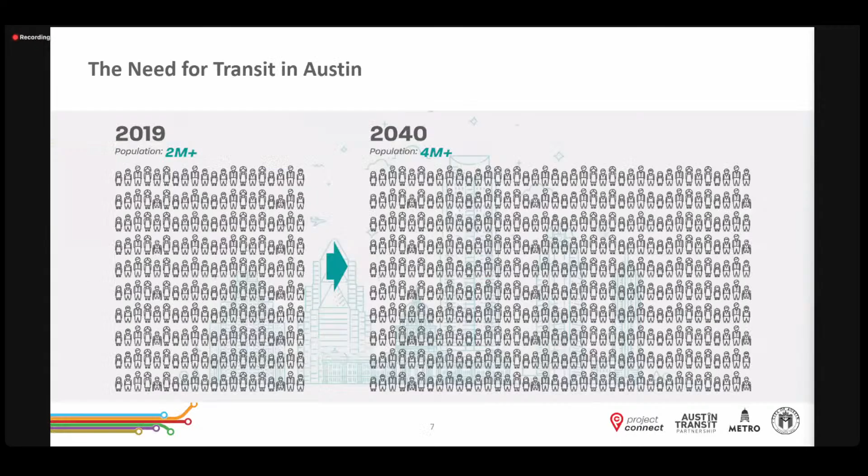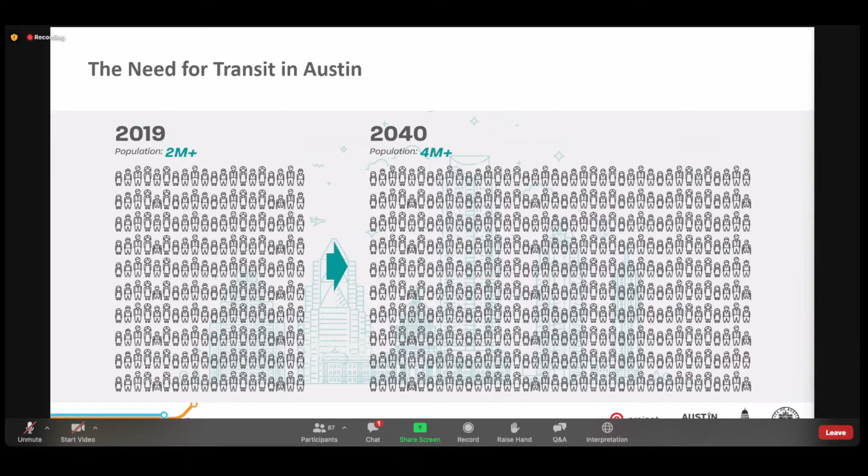Just wanted to introduce you to Project Connect and what we're looking to solve here. This slide explains the need for transit in Austin. Over the next 20 years, we're going to see a doubling of the population in Austin. Very popular city, a lot of people hearing about it, a lot of people moving in. What does that mean for us today? Well, all these folks cannot get into a car, so we're looking to address some of that growth by having people make smarter choices. If we can get them into light rail or a different mode, that's what we're hoping to accomplish. Will everybody get out of their car? No, but we're hoping to get a good number of folks to make smarter choices that are friendlier to the environment.

So, the Austin Strategic Mobility Plan. What this shows is the goal to keep the number of cars constant while growing our population by an additional 2 million people. You'll see as we go through these design drawings, this is where the policy rubber really meets the road, and why we are designing to a variety of modes to address that growth, while making sure all modes are respected and we're getting a good balance going.

So, Project Connect program components - some of the big things we've got here. By no means is it everything, but: a new light rail system, the blue line and orange line, a transit tunnel under downtown that will make everyone's trip faster, an expanded bus system like the 801 and 803 that currently exists, 4 new Metro Rapid routes, 9 new park and rides, and 11 new pickup zones. We are also transitioning to a zero emissions fleet, which, as someone mentioned this morning when we were on site, could also mean a quieter cityscape. You don't have a loud diesel engine, you have a quieter electric vehicle. So we're really looking to benefit the community on multiple levels, not just in having cleaner air, but also a quieter city.

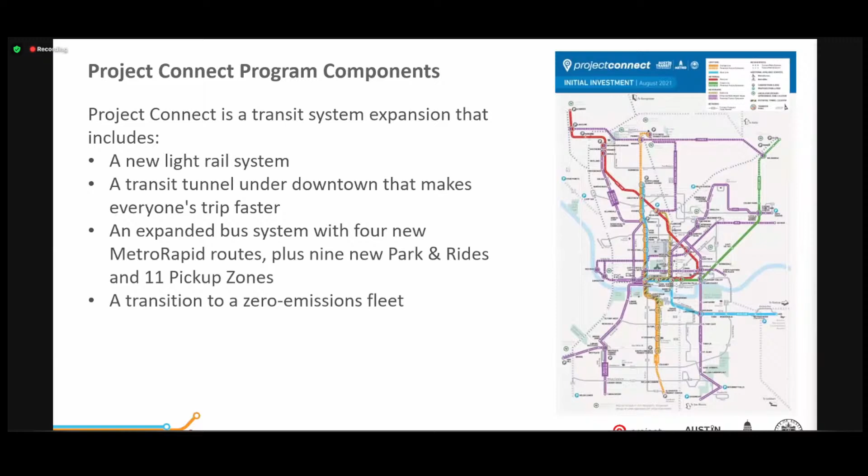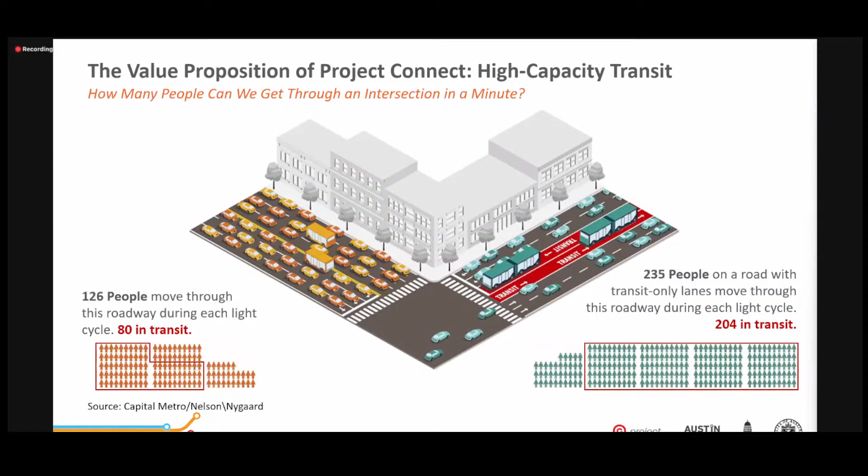So the value proposition of Project Connect - the question really is, how many people can we get through an intersection in a minute? As you can see with this animation, with the light rail transit line, we can get more folks through a light cycle than they would have been able to in a vehicle. On the left, you can see 126 people move through, 80 in transit, but with a dedicated right-of-way, 235 people on a road can come through, and 204 of those people are in transit.

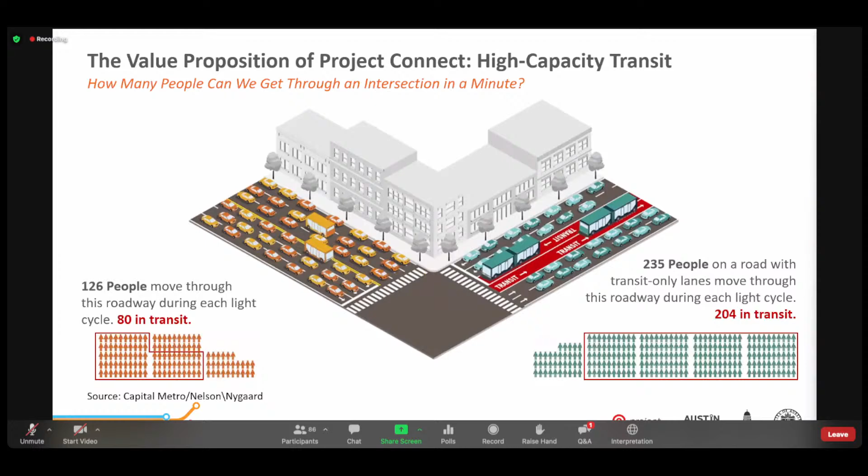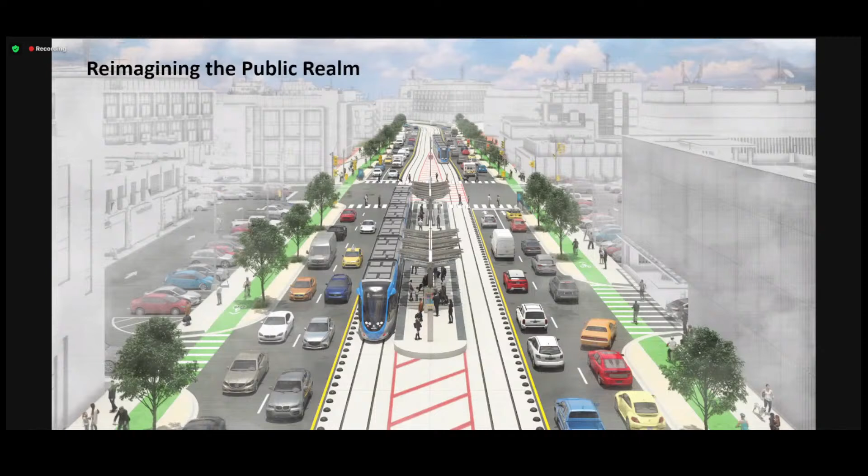Here we see a conceptual view of what Project Connect will look like. This isn't necessarily one particular location, but is representative of our aspirations. Moving the picture left to right, you can see a dedicated bike lane, new sidewalks, new trees, cars sharing the space, high-vis crosswalks, light rail in the center median, station platforms with shade, and again the same treatment on the other side - dedicated space for trees, bicyclists, and pedestrians.

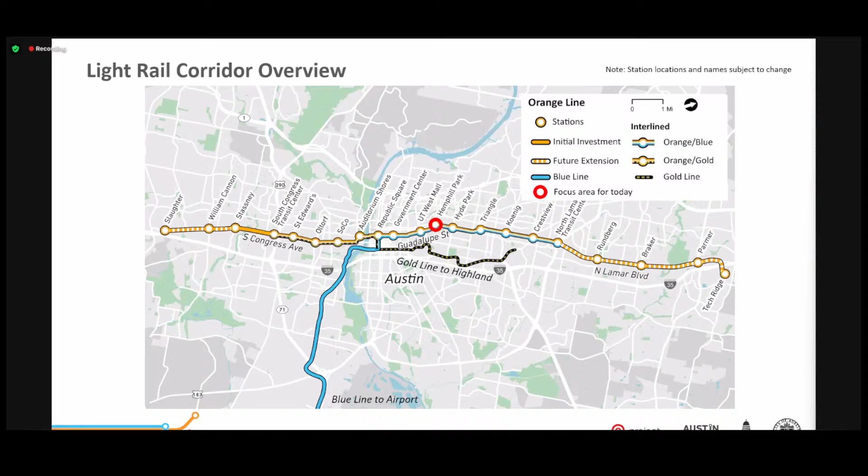We want to talk to the community about that, and then ending at the North Lamar Transit Center. The blue line shares that route south from North Lamar Transit Center, also serving UT and the drag, but as it goes underground it will serve downtown and then branch off to serve the airport and Riverside Drive. Next slide, please.

So hot topics, what we've heard, themes of interest, and we're going to hit on these throughout the night: public safety inclusion, housing diversity and community integrity, ecological resilience, health and well-being, efficient traffic planning, urban design excellence, consideration of the tunnel versus street level for Guadalupe from 21st to at least 38th Street, maintaining housing diversity and community integrity, and the greening of the route.

We've been hearing a lot from the community on these topics, and we wanted to spend some time tonight addressing some concerns and providing clarification. So stay tuned for the rest of the night, you'll be seeing us touching on these topics. Next slide, please.

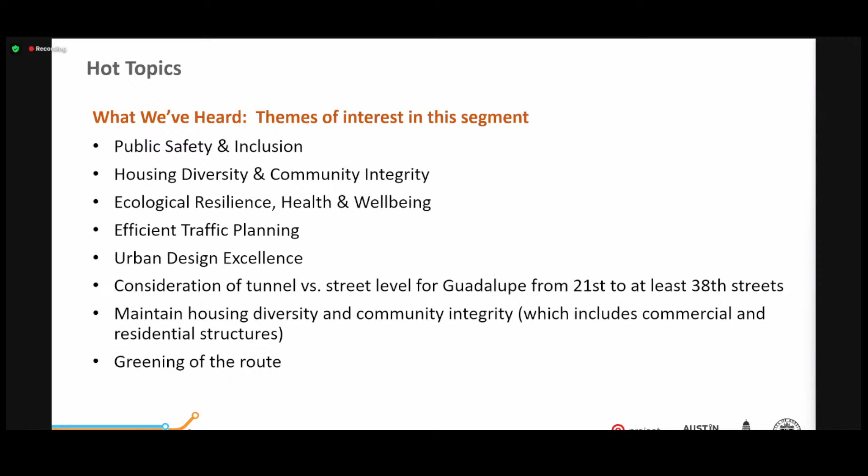So today's discussion areas, as Lonnie mentioned earlier, we're going to do it in two parts. I'm going to hand it off to Peter Mullan for part one. Peter?

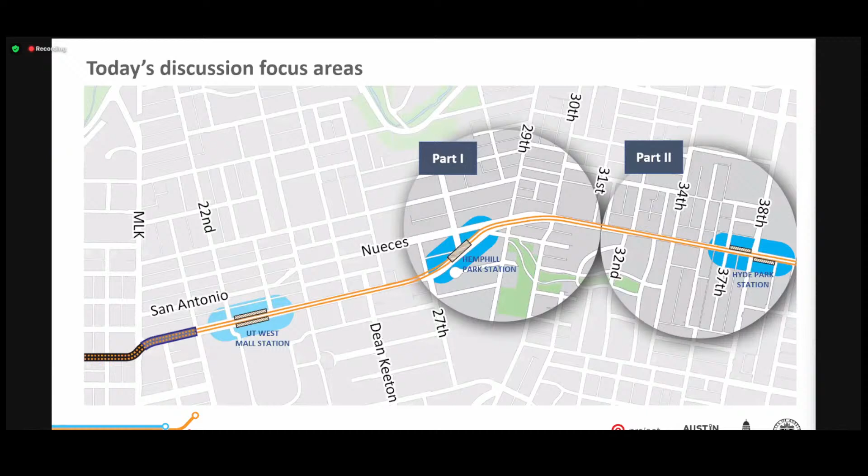Got to unmute. Still make mistakes on Zoom after all this time. Nice to see everybody, thanks for taking your time out of your evening to join us. Really appreciate it always, and as Lonnie said, if this is your first time, even better.

Yeah, we want to talk a little bit about 29th Street in particular and what's going on there. Some pretty interesting opportunities and some changes to the configuration of that intersection. Go to the next slide.

Just as a reminder, many of you may have participated in the community design workshop about the drag that we held in the fall. We are currently carrying two options for the drag, and those two options get carried forward all the way up to 29th Street. We'll talk about those two options when they get to the Hemphill Park station and 29th Street. Go back one, sorry.

Option A is an option where you've got the guideway with the light rail in the middle of the street, and then one lane on either side, which could be used for buses or buses and general purpose traffic, and then a shared use path on either side of that. Then go to the next.

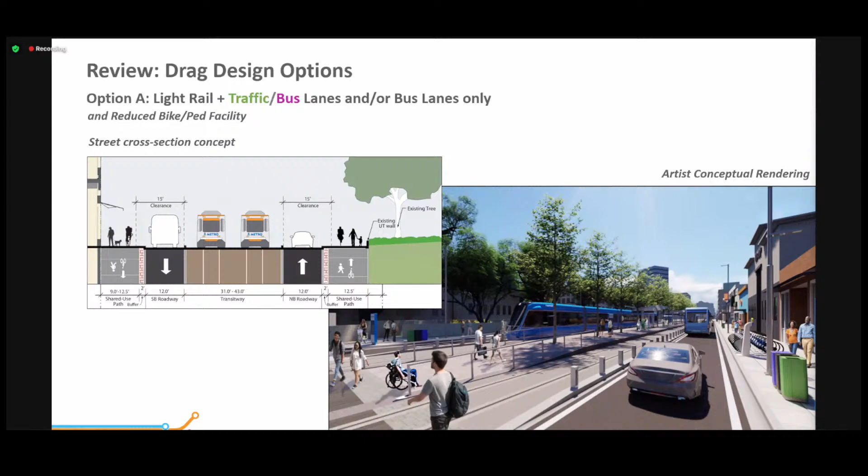Option B is the transit mall concept, where all general purpose vehicles would be relocated to other routes around the drag, and then the guideway would be used for light rail and potentially buses as well. Then you have separated facilities for bikes and pedestrians on either side, as well as trees, etc. So those are the two options, and they do move forward to 29th Street.

I do want to make a plug for another workshop we're holding on the drag on Thursday, February 24th, that's in two weeks. Hope that you will all be able to join us for that. Okay, next.

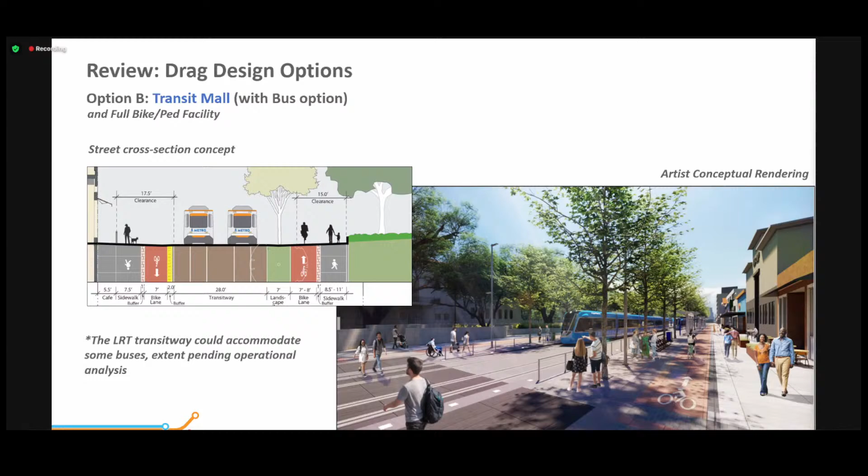Moving north from the drag, we get to the Hemphill Park station, between 27th and 29th, and then the intersection with 29th itself. As we go through this, you'll see there are a number of properties and blocks impacted by the alignment of the light rail and the reconfiguration of the intersection at 29th Street and Guadalupe. We've notified all property owners, but if we haven't connected with you and you're a property owner or operate a business in this area, we want to connect with you. Part of the purpose of tonight is making sure we're reaching all local stakeholders. So let's dive into this intersection.

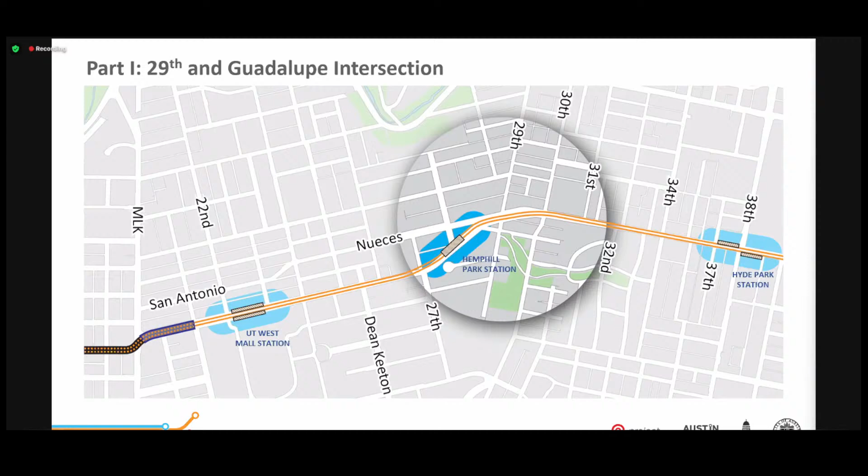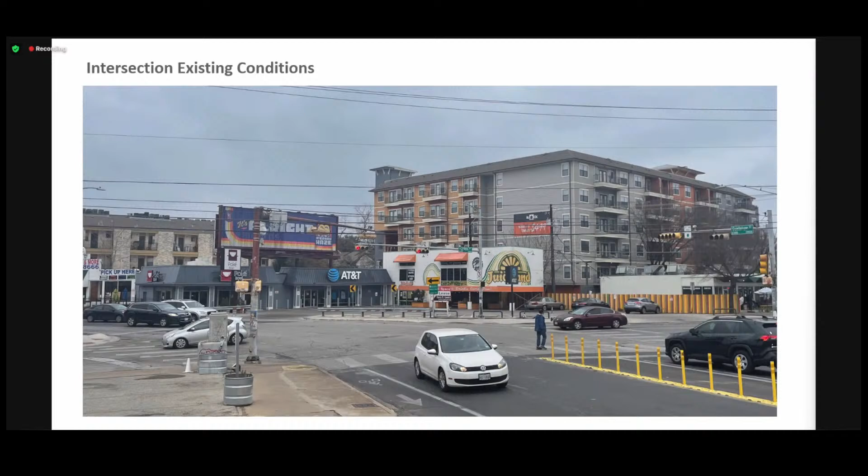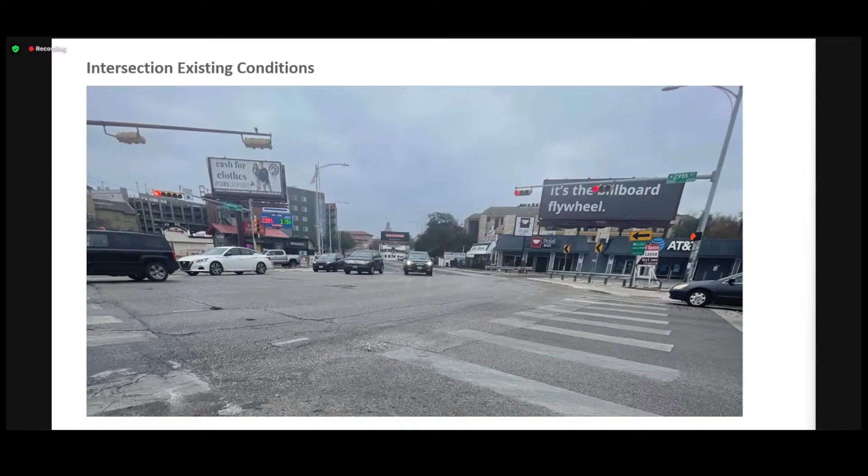This is a picture of what the intersection looks like today. If you've been here, you know just how difficult this intersection is for all modes, whether you're driving, on a bicycle, or a pedestrian. It's a pretty daunting place. You can see there's a huge amount of asphalt and very awkward geometry. If you're at Juiceland and want to get to Taco Shack, you have to walk across three different crosswalks and light signals to make that maneuver. It's very awkward, and also very unattractive.

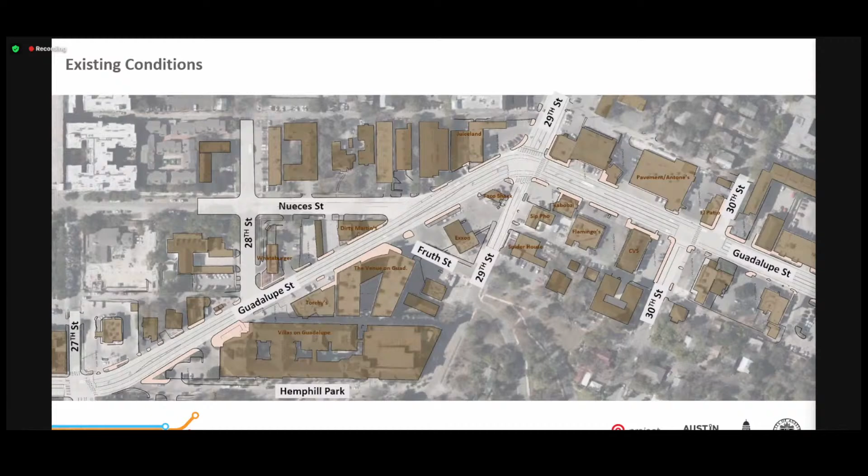If you look at the next slide, which shows option A, as Peter just mentioned, this is the one where we have general purpose lanes on either side of the trackway. You'll see we've had to create a geometry with much smoother and bigger radiuses to make all of this work. But it's not just about bringing the rail through this area—it's about creating a safer environment for all modes. Whether you're a cyclist, a pedestrian, or riding in a car, the idea is to make this a safer, more attractive, and more efficient intersection.

So option A again is the one with general purpose traffic lanes on either side of the trackway. If you're heading north on Guadalupe, you'd be on the east side of the guideway and join Guadalupe at the 30th Street intersection. You'd have a full movement intersection at 30th Street, also at 29th Street, where there would be a signal. If proceeding south on Guadalupe, you'd continue south along the trackway past 29th Street, or directly onto Fruth Street, which would be connected to that intersection.

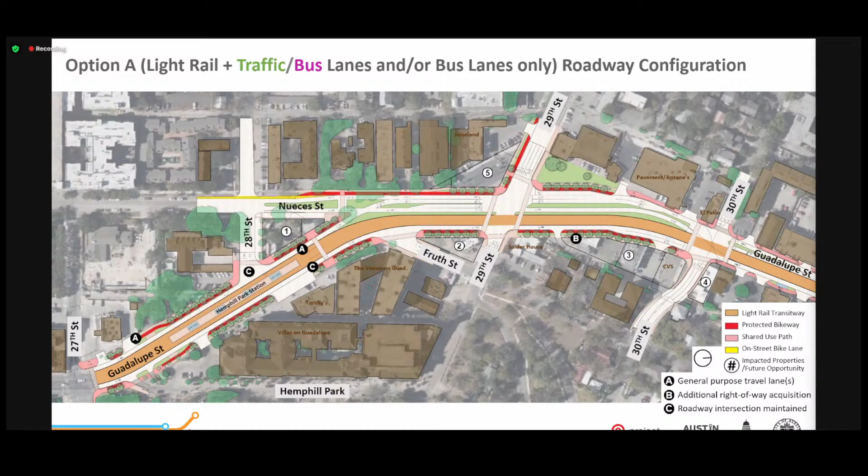Option B is very similar, but with the transit mall, all north and south traffic south of 29th Street would be directed onto Fruth Street, which would operate as two-way south of 29th Street—an improvement the city's corridor project office is planning to implement over the next year.

If you're a cyclist on either of these alternatives, the dark red on this diagram shows a protected bikeway, so a cyclist coming through here would be completely separated from the rail and vehicles, making it much safer. You also see a lot of trees on this diagram—we have the opportunity to create a much greener and shadier environment.

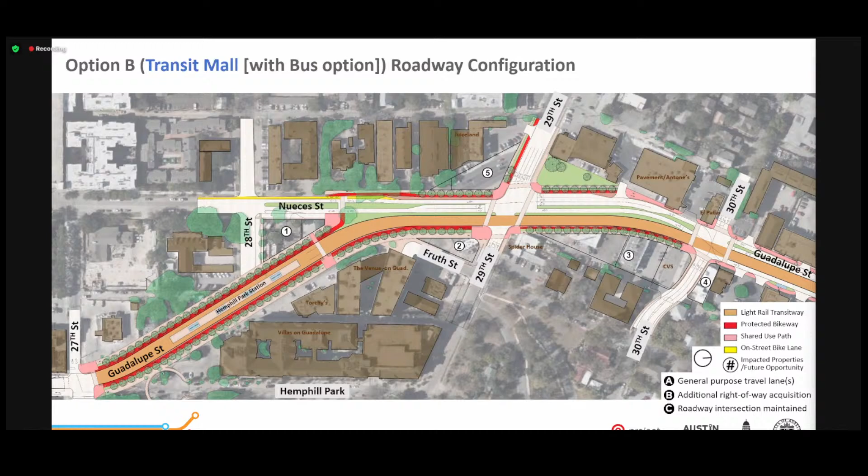The way transit works through here, we end up with remnants of right-of-way that are no longer needed, and remnants of properties needed to make this alignment work. So there's a question of how those properties might transition in the future and contribute to the public realm. We've identified one area in particular that we think would be ideal for public open space, at the northwest corner of 29th and Guadalupe—you can see here it could be a small park. But the overall goal is to make sure the rail works efficiently while creating a much safer and more attractive environment at the center of this part of town.

This is showing the existing condition on top and what it will look like in the future, resolving some of the awkward and unsafe aspects of this intersection.

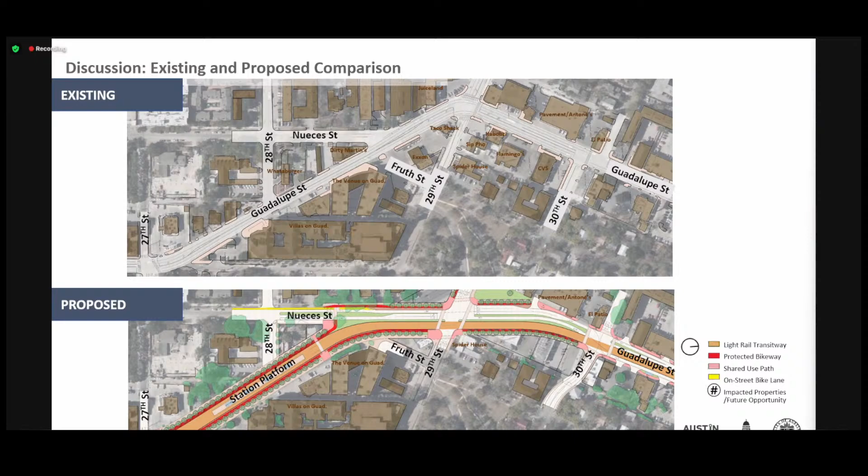Before we get into the tunnel discussion, one thing I want everyone to be aware of is that when designing a system like this, we only implement tunnels where absolutely necessary, and when it's the only technical option. For example, the downtown tunnel exists because we have limited block lengths and the stations are longer than the block lengths, so we don't want to block cross streets. We're also crossing under the river because there's no opportunity to come up sooner than we'd like. So those are the technical issues, just as an example.

Anytime there is a tunnel, one objective is to come back to the surface as quickly as possible, because it's more cost effective to operate that way. So the question is, does extending a tunnel, and the perceived benefits of that, justify the additional cost?

Let's play the what-if game. Say we wanted to extend the tunnel here in scenario one. On the bottom left-hand side, you see the tunnel portal outlined with blue dashed lines. That's where we're proposing the existing tunnel portal, and it would rise up out of the ground and be at grade throughout the West Transit Mall.

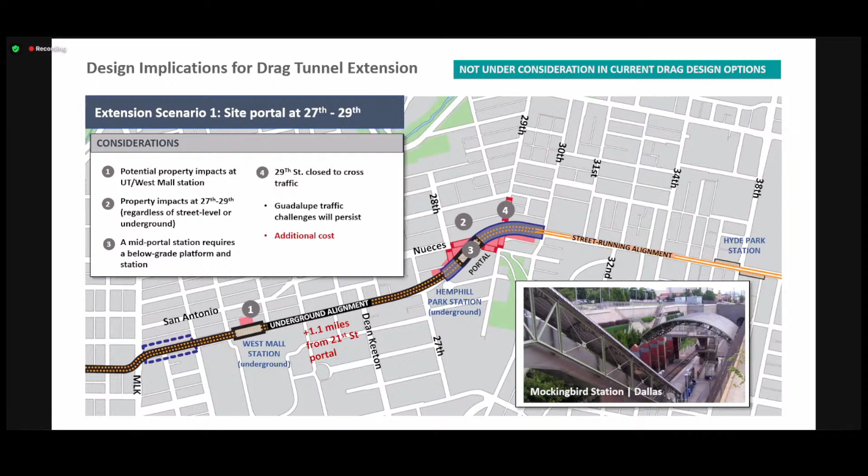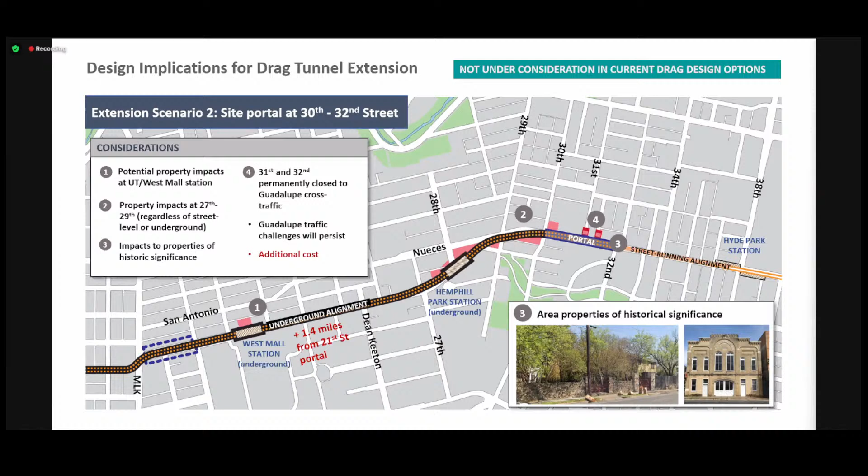In scenario two, the next logical portal location would be somewhere between 30th and 32nd Street. Now we have the cost of two underground stations — one at West Mall and one at Hemphill Park — so that's additional cost. The portal itself is also an issue because on either side of the right-of-way where the portal would be are two properties of historical significance that would likely be impacted due to the wider right-of-way needed in those areas.

The last scenario would extend the tunnel all the way out to 34th Street, or just south of 38th, between 34th and 37th. This scenario has a couple of issues as well, since it would require closure of east-west traffic on 35th Street, plus additional property impacts, and impacts to some pretty significant storm sewer lines in that area, about 108 inches in diameter.

So it's pretty significant, and you see that extending that tunnel just adds a lot of additional costs without a lot of benefit in this particular area. Bottom line, when other options are available, you take those other options. You don't build tunnel, you only build tunnel when you just don't have a choice. An additional 1.7 miles of tunnel would be quite extensive and really not generate the benefits we'd like to see.

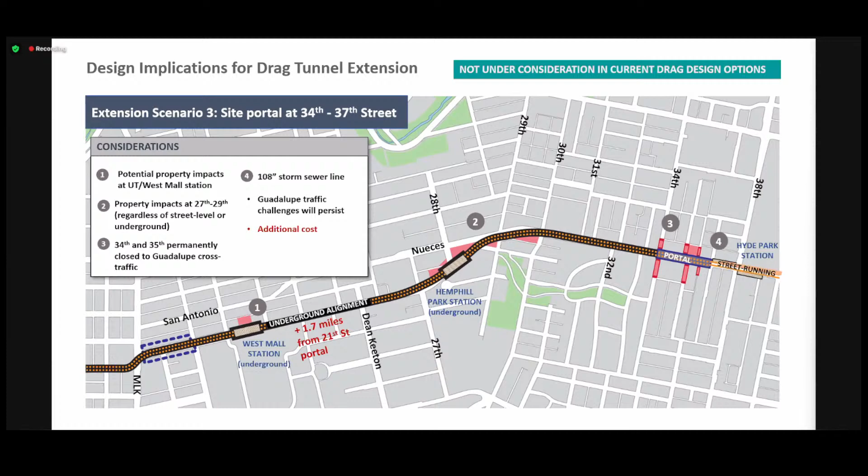Well, thanks, Jerry. I appreciate your help here with this section. I know that several people have already been asking some questions in the Q&A and in the chat.

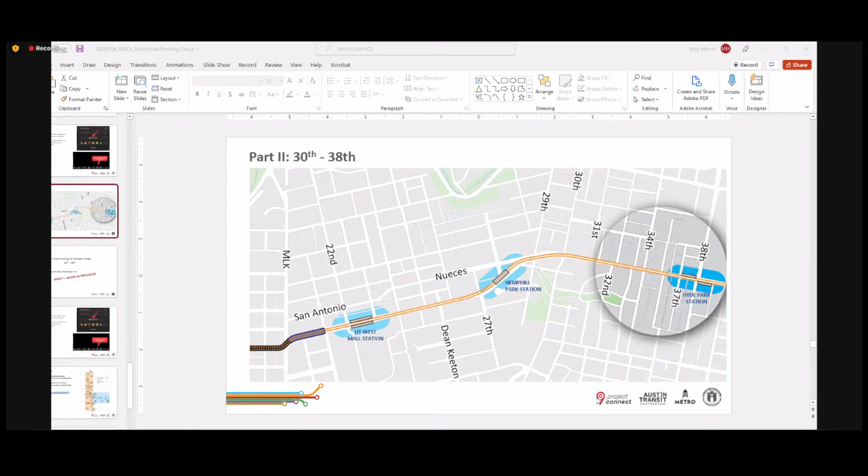In progress, live updated, yes, in progress. So we're going to transition a little further up the corridor. I just want to ask for the technical folks on this meeting - there's still a lot in the Q&A, so if you could take some time to put some answers in there, that would help. We will try to circle back as well, but we're going to move up the corridor to 31st Street and above, and we're actually going to walk through and look at some of the schematics themselves. This is an exciting first peek because we're kind of in between the 15% and 30% design, so you'll see where we are at the moment - it may change a little, but this is where our thinking is.

So EC, I think this is your part of the show, right? I think so. All right, good. Okay, so if you can hear me and if you can share my screen, I think you do. Okay, perfect. So what you're seeing right now on the screen is the latest design that we have. It's in a weird program, so that's why it looks weird. I want to explain here first what you can see so you orient yourself and know what each color represents.

To the right of your screen, that's north. And we are seeing here 30th Street, which we already talked about. In the middle of the road, you're seeing this green shading, representing the area where the orange line is going to be. The red line is the northbound train traveling north, and blue is a train traveling south.

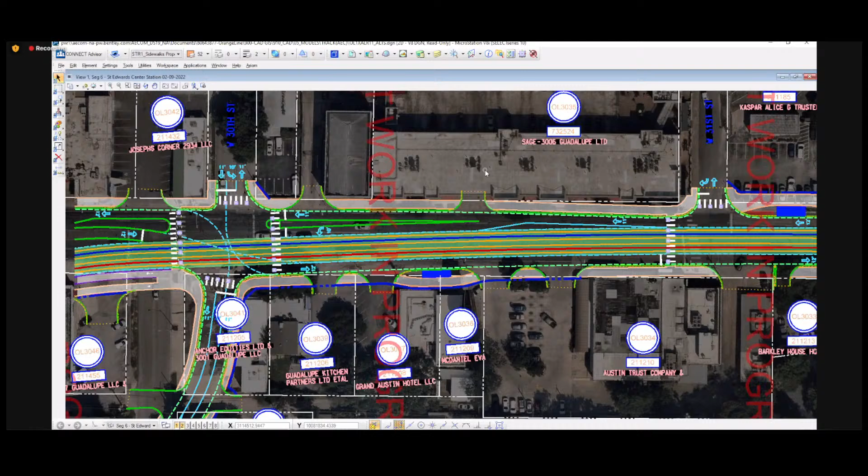Okay, so this is not the names of the businesses. This is the name of the owners. That's what we have right now. That's what you're saying, so if it's not helpful, I'll turn it off. It might be blocking more than helping. Yeah, I think it's more, I don't know if other people think it's a lot. Yeah, I feel the same way.

We'll just make sure to point out businesses as we're moving, but it looks like El Patio and Wheatsville is there, and that line's getting real close to Wheatsville.

Yes. So let me go into a little bit more detail on what you're saying so that we can talk about certain impacts that we're seeing. The gray shading is representing, in other areas, sidewalk and/or bicycle facilities. At this location, we are showing a shared use path. I saw that comment in some of the questions. We're showing a shared use path because, as you all know, it is very constrained around here. So when possible, we are reducing the sidewalk and bicycle facility, like a bicycle lane, to a shared use path in order to reduce the building impacts.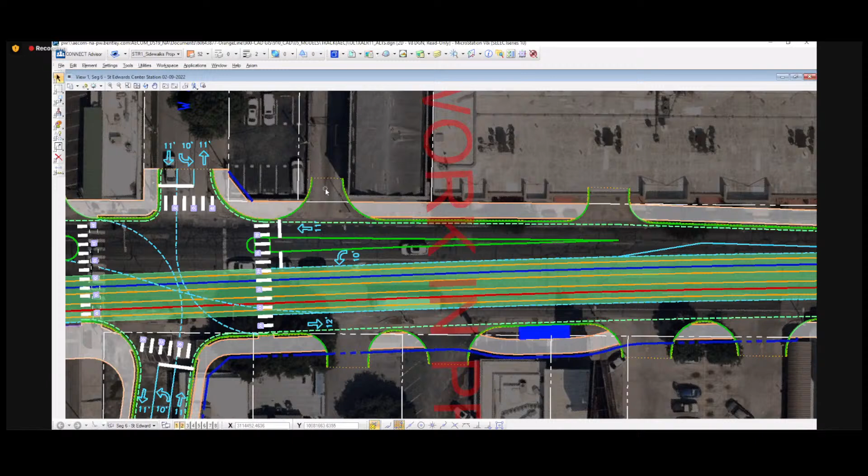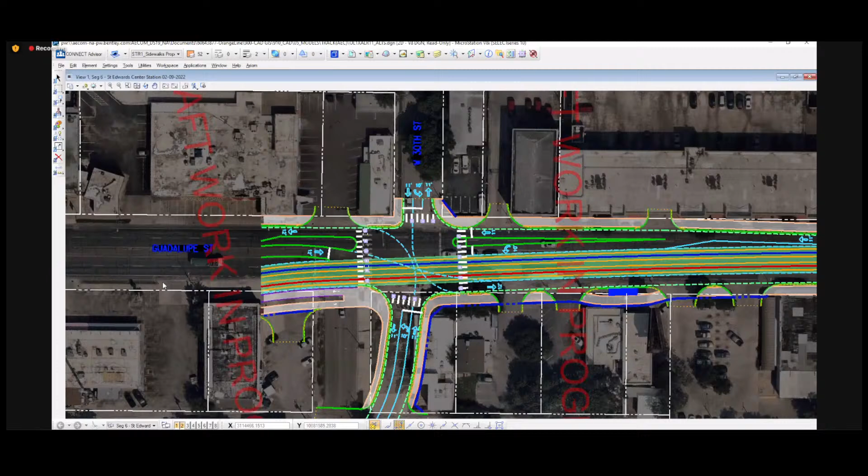Whenever we reduce that and see that it means we're no longer impacting a building, we go ahead and do it. If it doesn't really result in a reduction of building impact, then we go ahead and show the ideal cross-section where we have a separate bicycle and separate pedestrian facility. So that's why you're seeing the shared use path, because to the south you see the separated path. That's perfect, I think that's good. So right here you can see it separated, and then just north of 30th, we're reducing it to minimize property impacts.

And then the blue line is a proposed right-of-way, and the white line is representing the existing right-of-way. So that's going to give you an idea of where we are showing impacts and where we're not. And then just throughout, you're going to see blue boxes, and that's representing a bus stop. I do want to clarify, this design is in the works, so things are changing. So just keep that in mind.

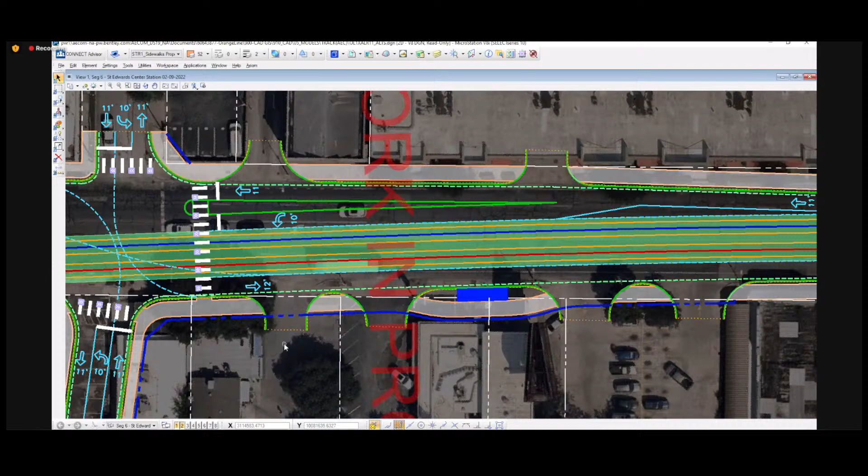As for the shared use paths, I know it's really constrained, so we're trying to reduce impact. The minimum width is going to be 9 feet, though it varies.

So let's talk about this location, for example. Here we have residences on the left side, and that's why we're trying to reduce impact as much as possible. We have Wheatsville right here, and at this location you're seeing a pedestrian crossing. This is a signalized pedestrian crossing, but we're only showing it as a proposed crossing, not for vehicles to turn here.

There's already an existing flashing beacon, so we are maintaining that. If you're a car trying to access Wheatsville coming from the north, you'll have to go to 30th Street, do a U-turn, and that's how you'll access their parking. If you're coming out and want to go south, you'll take a right and go to the next signalized intersection at 34th Street, do a U-turn, and go back south. As far as access from delivery trucks to Wheatsville, that's still in the process of being figured out. We are coordinating with Wheatsville to try to figure out how to best accommodate that.

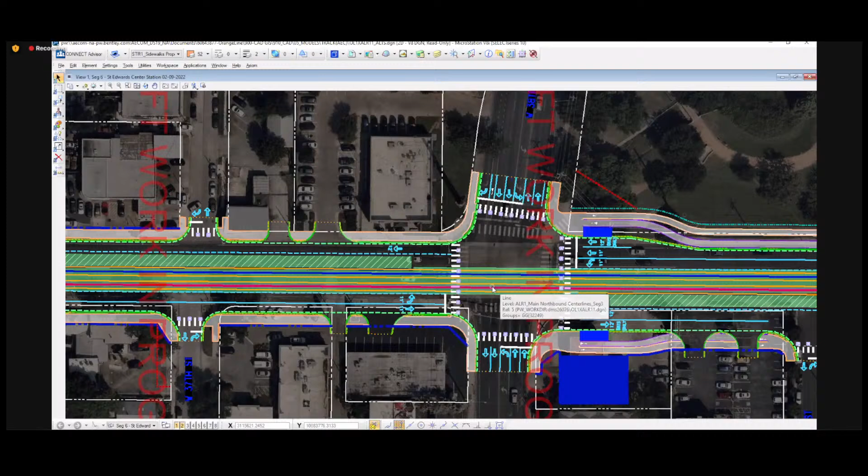And why do you go split versus a center platform in this location? So when we have an intersection like this, we go split because you have the train in the middle. In a normal intersection, when you don't have a train, you normally align the left turns and they disappear. When you have the train, you can't align the left turns, so you're already going to have this space here that nobody can use for some distance, and then we transition back to the middle. Since you already have that space, might as well use it and have the station there so that we minimize right-of-way impacts. If we were to have a center platform, then wherever we have that platform is just going to be wider - much wider impact. Thanks for that.

And then there were some questions about U-turns being realistic. Are these U-turns just 'make a U-turn,' or how are we making sure that people can actually make a U-turn? This is all in the process of being evaluated, adjusting the design to see if we need to make any adjustments. And also I'm assuming there'll be lights involved, right? Signalized is what he's going for. So the U-turns would be signalized. They'd be protected.

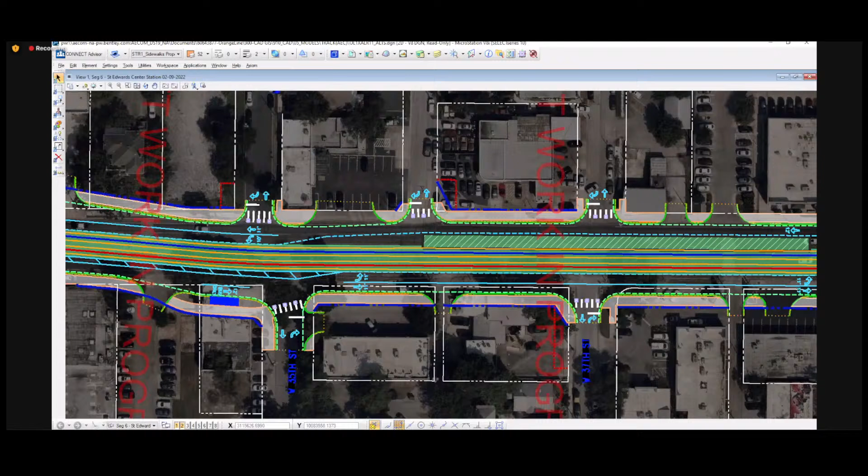Betsy, did you want to unmute? I didn't have a question. Ah, well, your hand was up, so I called on you. But hi, thanks for being here tonight.

How about Ava McDaniel? I see your hand is up. Would you like to speak? Well, I see you're unmuted, but we can't hear you. If that continues, you might want to send me a chat and I can read your question on the air if you like, so that we can answer that.

We do have a question, Lonnie and team, about - similar to how we covered the consideration of underground - do we consider elevated in this segment?

Ah, yeah, that's a really great idea. So I know a lot has been talked about tunneling - what about going up in the air? Isis, can you maybe zoom out a little bit so we can see the section as a whole, maybe from 38th down to 31st? I think just to give people context, that'd be great. Thanks.

So we did consider that early on as we were developing the locally preferred alternative, but that was dismissed very early because aerial tends to be a little bit more obtrusive from a visual perspective, and also due to the proximity of the neighborhood, particularly the Hyde Park neighborhood there, it would receive a significant amount more noise. So it's more of a noise issue than anything. Everybody seems to think that if it's aerial, you're avoiding all these various conflicts, but those bridge piers still have to go deep into the ground, and there are still utilities that have to be moved regardless. So the only thing you get to do is maybe save a little bit of your traffic lane widths and stuff like that. But we dismissed it.

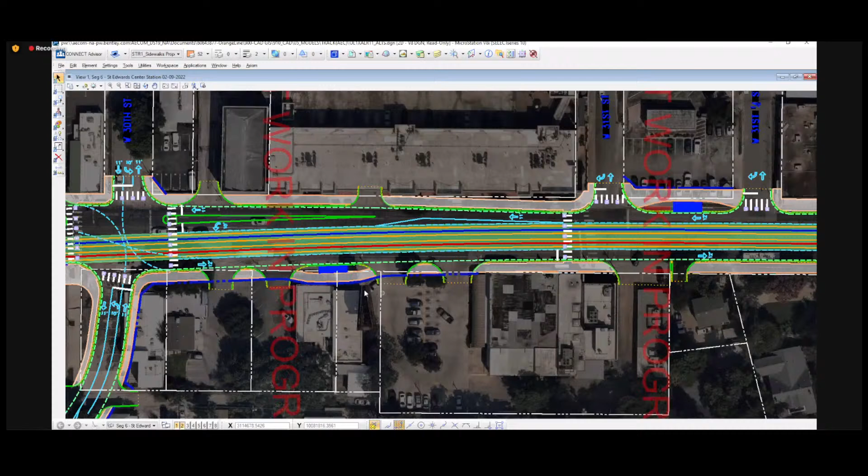There's a bus stop in front of my building at 30th and Guadalupe where Supercuts is located. The building south of me, which is Bickles, we have a shared party wall. So is that going to impact, are you going to have to tear my building down? That's all I want to know.

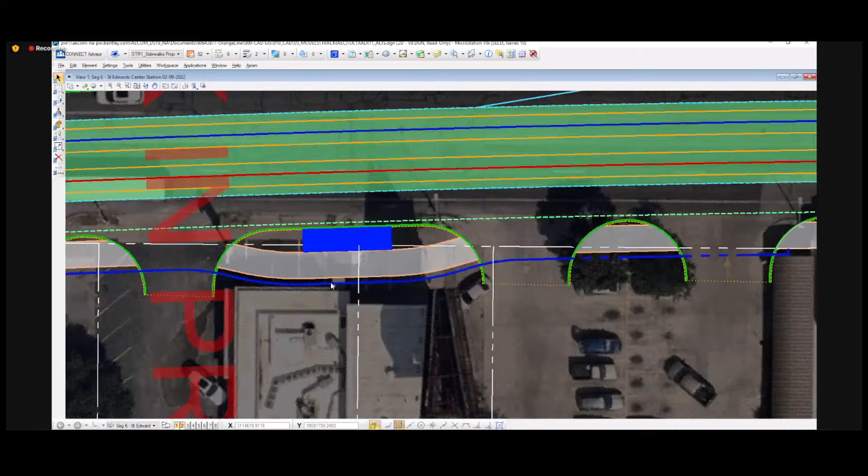No, as you can see, we are not touching the building. I can see how the blue line looks like it's very close to the building. We are verifying, and the reason I'm telling you yes or no is because I'm checking the topographic data that we have, and we are not touching the building. You also have to keep in mind that we are showing some setback between the edge of the sidewalk and the building, so there's more feet there than what it's easily seen. So, no. Okay good, I'll quit sweating bullets now. Thank you, I'm glad I could help.

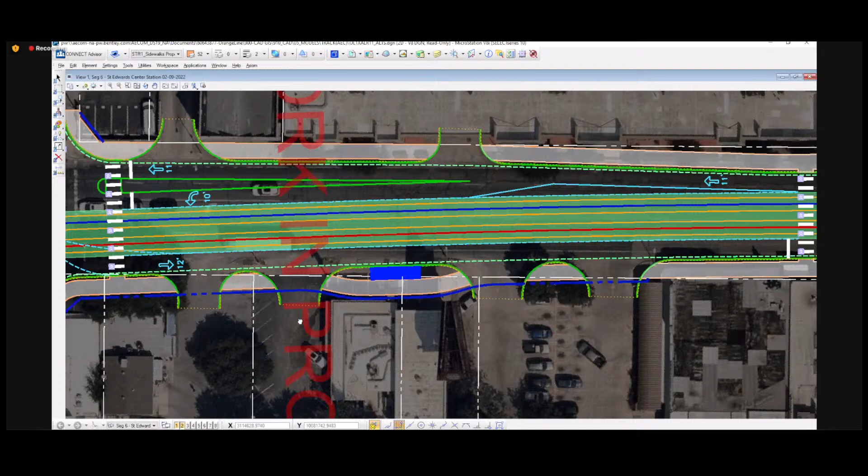Okay, Lonnie, I think Lonnie is muted, but I think there we go. Yeah, you're right, I muted. There was a question. Oh, actually it looks like Jerry already answered it in the chat. I don't understand Mr. Toth's question. Oh yeah, which one is that? Well, I know he was here before. We could always let him ask it live. I think it's asking about the width of the shared use path.

I'll tell you right now, yes, we're showing it to be around 10 feet. Where'd you go, he was here a minute ago. I guess he put his hand down. I will answer that. All right, well, here he is again.

Chris, you're on the line. Yep, it was just about, I walk that regularly and it's already pretty tight as it is on the sidewalk, so it's awesome to hear that it's going to be expanded. Thanks. Yeah, I think it's really a challenge in a lot of places where we have existing sidewalks. We want to make the greatest amount of improvements, but there are trade-offs. There's just only so much right of way. Unless you want to actually start literally taking a full row of properties on one side or the other of Guadalupe, we can't fit everything in to make everybody perfectly happy. I think that's always the challenge, it's about the trade-offs.

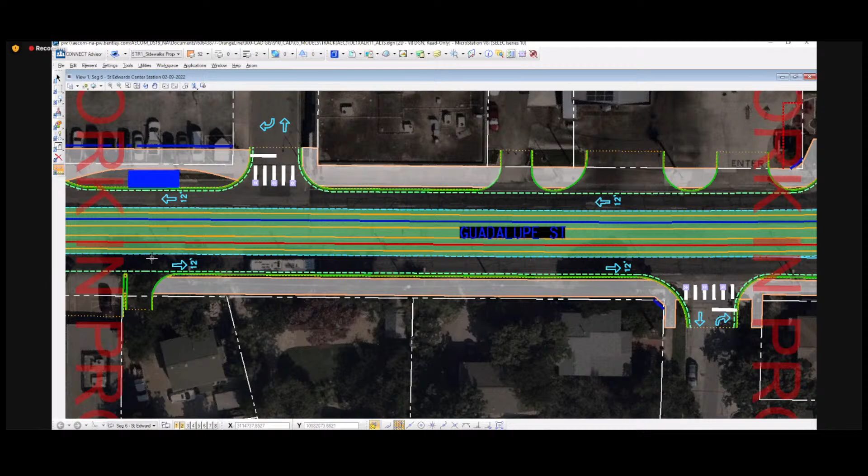So let's see, I've got a fun question coming from Anna Aguirre, but before I get there, I wanted to pose a question to this group, and I'd love it if you'd use the chat for this one. We want to return to in-person working groups for sure, it's a lot easier when we can see your face. And so we need to meet somewhere, and you know this part of town better than anybody. Are there any places you feel safe to meet in person in the next few months? Brainstorm with us in the chat, we'll take those into consideration and bring it back as a survey, so we can start meeting in person rather than always on Zoom.

But as promised, I wanted to bring up Anna Aguirre's question. I'm not sure if this is for the planning team or for ATD folks, but she was asking: is anyone comparing what the current walkability scores are versus what they will be in the future? And not just in this area, but on the whole line, how are we considering walkability in the context of this project?

Anyone want to take that? I was just going to ask our city partners, they do a lot of baselining and data collection. So maybe not specifically with walk score, but Anna, do you want to talk a little bit about how you all are assessing baseline conditions versus future, just generally speaking?

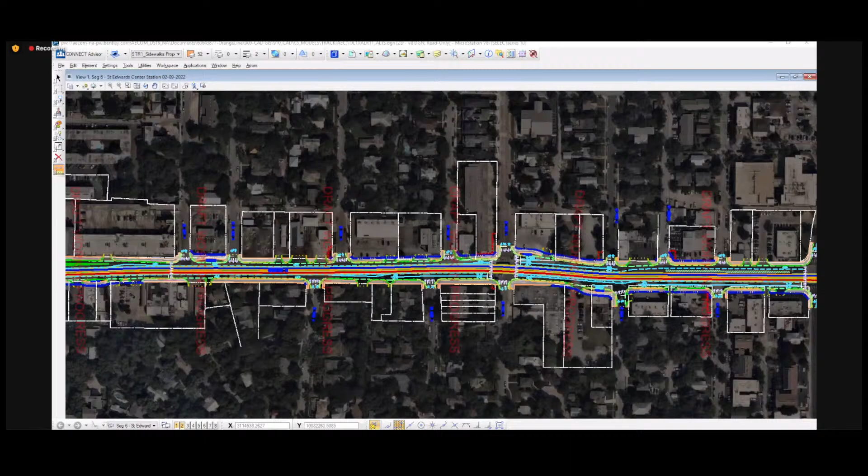Thank you, Anna, I love that idea. I know there are realtors in town who post walkability scores, so it'll be cool to see those evolve. I'm going to put up our next steps slide so we can take a look at what's coming up in terms of engagement for this area.

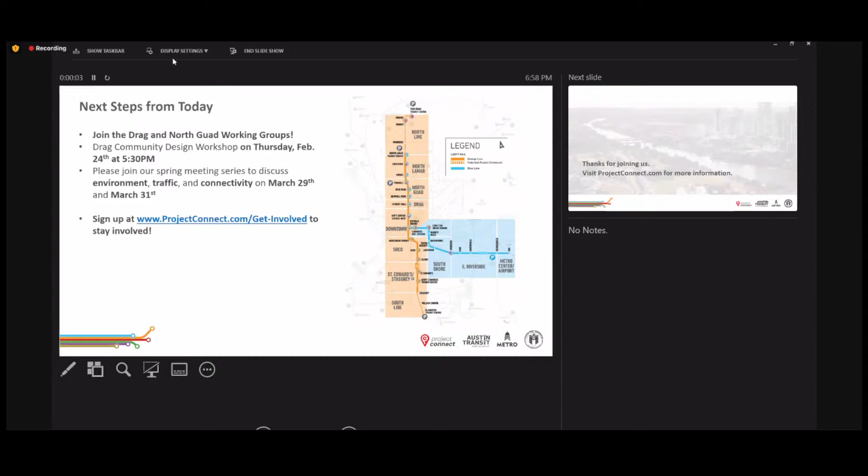Well, in the meantime, I just want to applaud everybody for putting so many good ideas in the chat. I know people have various sensitivities about whether we're in person, outside, or inside, so we'll come back and crowdsource it. I also want to address one thing that came up: we recognize that for many people, virtual is the more convenient option. So we imagine a future with both in-person and virtual events, but we want to make sure people feel safe and welcomed and able to speak, and not everybody does using this platform.

Take it away, Meg. All right, so Bikram, our Orange Line outreach, will tell us a little bit about what's on the docket coming up. Yeah, thanks Meg, really quick, thank you for joining us tonight.

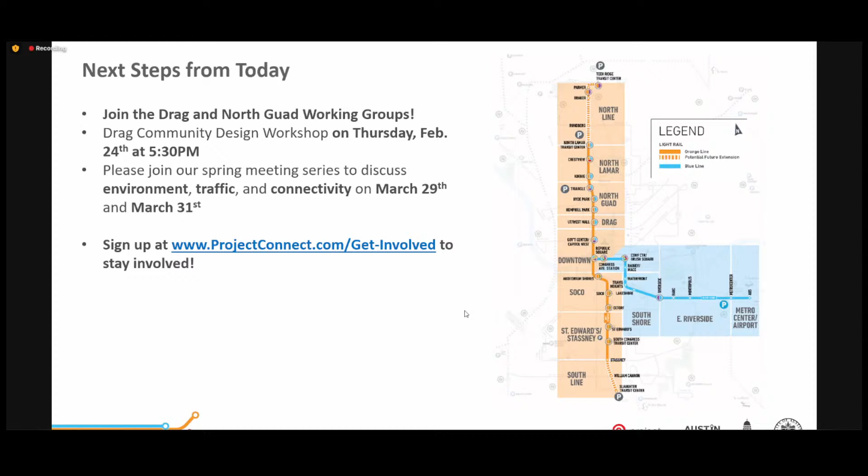We are going to have a Drag Community Design Workshop on Thursday, February 24th, that will be virtual as well, looking to get more interest from students for more input there. It'll be basically the same materials as the December design workshop, but everyone here is welcome to join. Then we're going to have a spring meeting series to discuss different themes, not geographic specific, so you can mix it up with neighbors in South Congress or Riverside about themes such as environment, traffic, connectivity. Those will be on March 29th and March 31st. Please go to our Get Involved page. We have more working group meetings planned for different parts of Austin, but please join us at the Drag design workshop. And that's it for all of it.